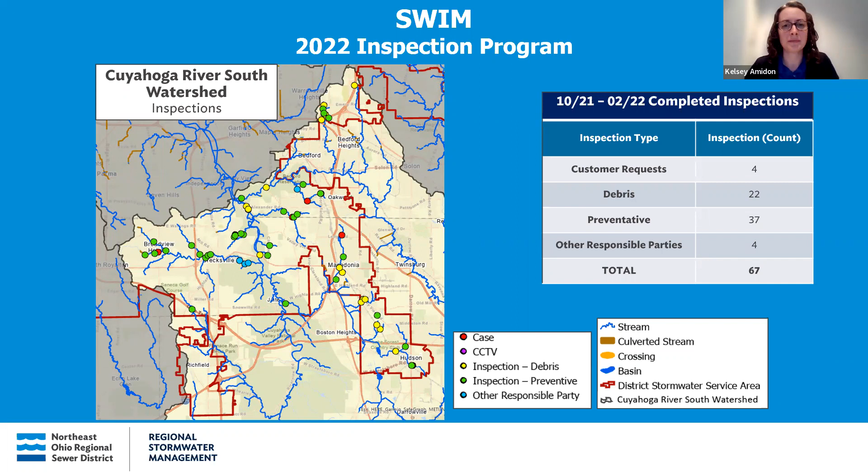So we're going to give a couple examples of inspections that we've done. These are photos from a customer case along Sagamore Creek in Walton Hills.

SWIM recently completed a small stream bank stabilization project at the crossing outlet in 2020. You can see that in the top left photo. The owner of this home called us because they had noticed some new erosion just downstream of that project, so we wanted to make sure our project wasn't causing any issues.

So we looked, and there is some recent erosion in that top right photo. You can see a little bit of recent slumping that had occurred, but it's far enough downstream from our project that we don't think it's related to this. But the bank was actually pretty stable.

Definitely some slumping happening, but it's very well vegetated. There are gabion baskets on the opposite bank, but they're in pretty good condition. Just downstream of this area it becomes pretty stable with lots of visible shale, so it seems to be a pretty isolated area. We're going to continue to monitor this area to see how the erosion continues, and then assess from there.

It's also part of a greater project area for stream bank stabilization, pending our internal prioritization and vetting process.

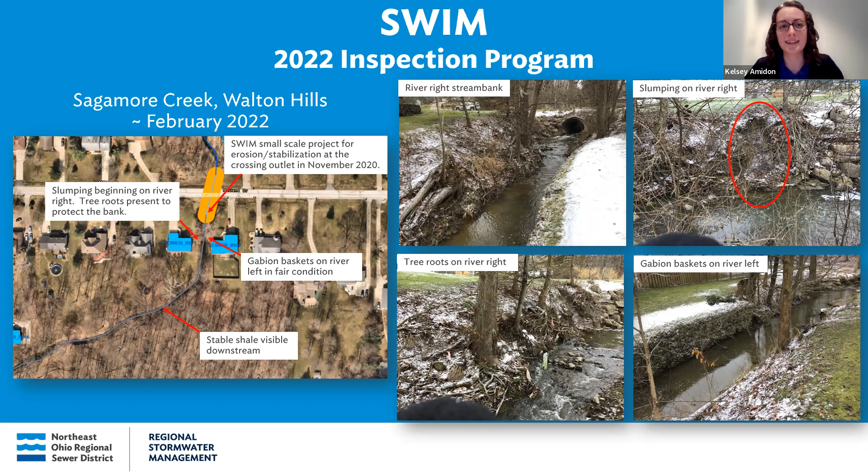So another customer case for erosion, this time in Sagamore Hills Township. The stream banks on River Right and River Left are both eroding, near this pedestrian footbridge.

If you look on the map on the left, it's just upstream of a culverted stream. This customer called because they're concerned about the erosion coming near their deck and their home, so we went out and looked at it and took some measurements.

We noticed that there is a small sediment bar in that top left photo, kind of in the center, and that's pushing the flows towards that left bank and a little bit closer to their structures. It's not necessarily affecting those structures at this time.

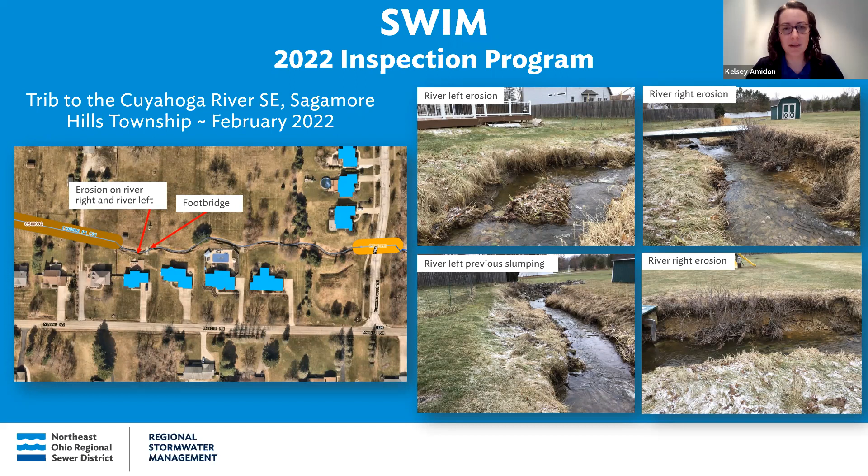So we are going to keep monitoring it to see how it continues and if maybe it's self-stabilized a little bit. We also nominated it for a small scale project to stabilize this and remove that sediment bar to take some of the pressure off that left bank. This asset is also part of a much larger project area that's still pending the internal prioritization, but we're going to keep monitoring it and potentially do a small scale project at this site.

A couple examples of the maintenance. In December, our maintenance crew was out removing debris at the culvert under Derbyshire Drive, and they noticed that the flow was extremely low compared to normal. So we went out to figure out what was happening out there.

We discovered a small blockage upstream of the culvert. The blockage wasn't huge, however this is a pretty flood-prone area, so we went ahead and removed that debris, especially because it's upstream of a culvert, and we don't want it moving downstream into the culvert where it would be harder to remove. This was just a preventative action to make sure the streams are free and clear and conveying, ready for the storm events probably coming this spring.

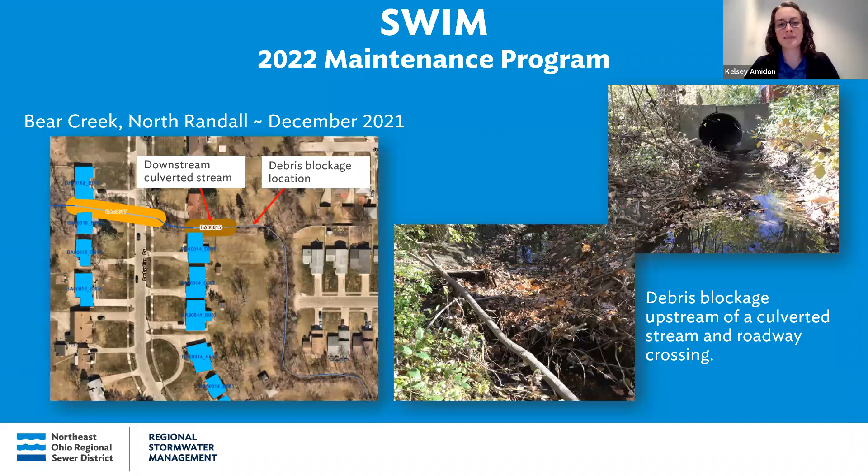Last, we finished up a small scale project in Valley View under Morningside Drive. In January of 2020, an inspection revealed, in the top left, this kind of extreme erosion around the river left wingwall.

We noticed there was a lot of sedimentation at this inlet. If you look at the center photos, the top one is before and the bottom one is after we did a sediment removal in 2020. After that was completed, we went forward with a small scale project, which is the after photos on the right side of the screen.

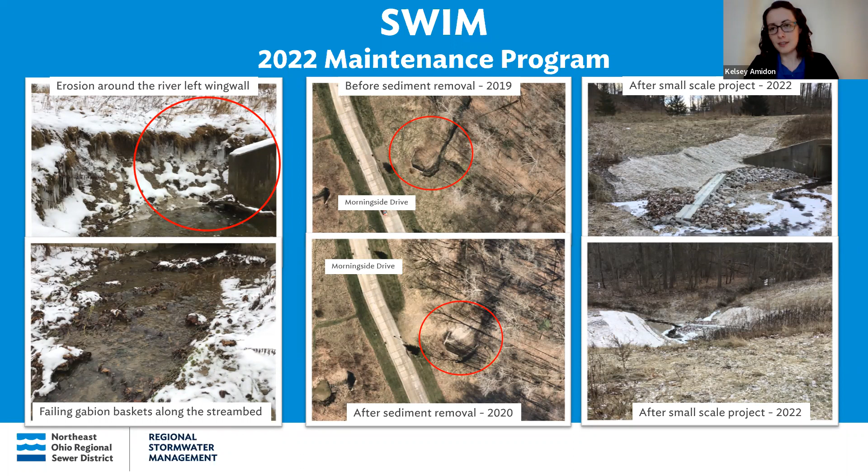This project was completed in November of 2021. We stabilized 61 linear feet and aligned the flow path so that it's no longer hitting that river left wing wall. They also installed a concrete block vane arm, which you can see in the upper right photo. That was to reinforce that bank as well as to discourage sedimentation at the inlet, hopefully keeping it from eroding as it has in the past.

With those projects, we have started establishing project monitoring plans. These were developed for 34 project sites, which includes 13 small scales and 21 design and construction sites thus far. As we continue to do projects, we will create more of these. These are a list of standard work instructions specific to each site, detailing what we need to monitor and the components of the project. These are not an agency requirement, but a standard operating procedure we created so that we can help protect our investment.

We'll look at things like the plantings, how the plants are doing, whether they're healthy, if there's invasive species, as well as what structures we need to look at. We monitor these sites twice a year for years 1 through 3, and then annually for years 4 and 5. After that 5th year, we determine based on how the site is doing and what it looks like, how often we need to monitor from then on.

This is our Bear Creek stream bank stabilization site in North Randall, completed in 2020. There had been some erosion, especially around a local outfall at this bend. When we went out, shown in the photo on the left, shortly after it had been completed, we noticed that some of the new vegetation had been deer browsed. So we sent out our internal maintenance crew to put tree cages and better protect that vegetation, as you can see in the photo on the right.

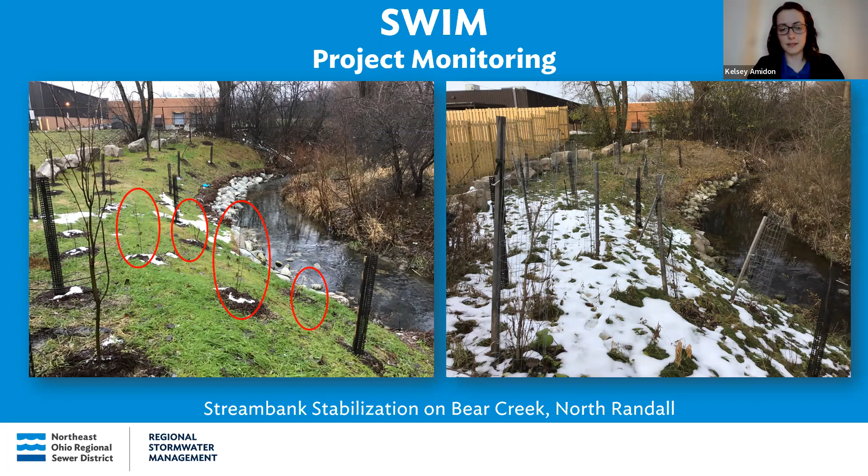With all of those sites, whenever we need maintenance, we have this internal landscape maintenance crew that provides services such as mulching, planting, replacing trees that have died, adding tree protection, and trimming trees. We do a little bit of invasive species management too. This is after the 1-year warranty of a project, if it's within that 1 year, the contractor will perform the maintenance. But after that, we have this internal maintenance crew that will go out and do the maintenance, so they can protect our investment better.

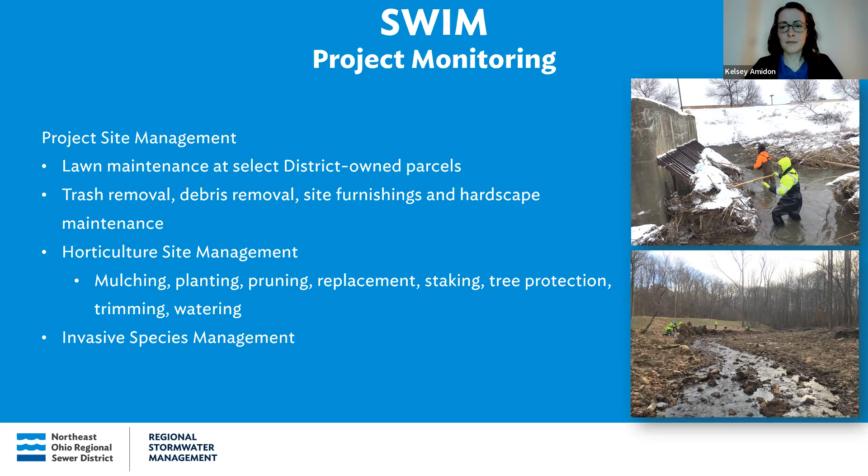No questions? I don't think so. We do, I thought I had one question, Rachel. It might go back to Myring, it was a throwback to the initial conversation about the flood tool. You saw that question come in, Myring? Yeah, Claire, if you go to the link, you'll see there are different options there, so parking lots and things like that, yeah, you can put those in there. So if you don't have an address for the structure that's flooding, if it's a parking lot or a restroom or a road, we definitely want to know about that.

If it's part of the natural area flooding, that's not something for the flood tool to use. So if you have a parking lot or a road or infrastructure for Cleveland Metro Parks that's flooding, just put in the coordinates if you don't have an address. That will populate a point on the map for us, and then just make a description. There's also a way for you to upload photos, which help a lot because when we do the modeling, we can see what the water level was in that area for different storm events. I hope that answers your question.

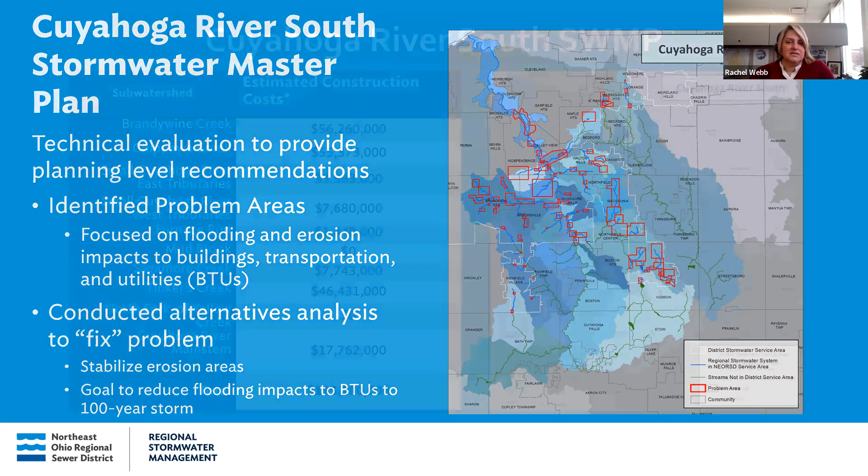Those were the types of recommendations that came out of the Cuyahoga River South Master Plan and the subsequent 3-4 we have done. The costs associated with those problem areas were upwards of $195 million for the Cuyahoga River South master plan, and those problem areas are the red boxes. Hopefully you remember this from past presentations, but it's just a refresher on what we did and how we got to the problem areas through this planning process.

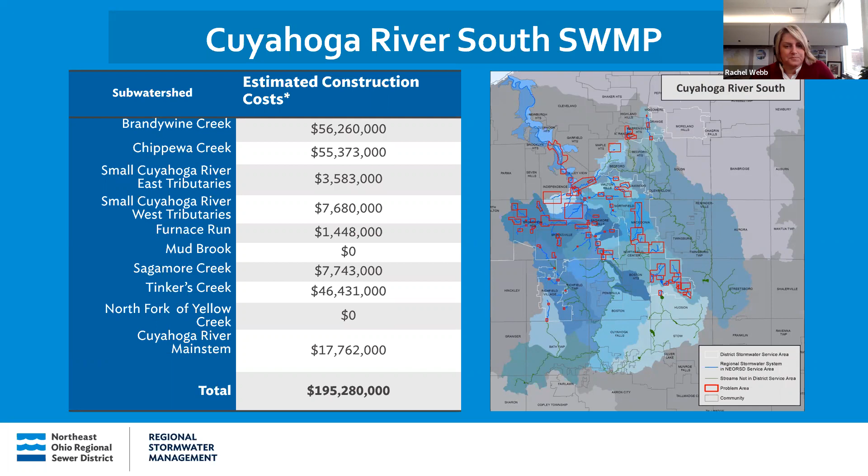So thinking beyond just the South, we have master plans completed and problem areas identified for two other identified watersheds - the Cuyahoga River North and the Rocky River. There are 70 problem areas from the North, 152 from the Rocky River. I'll say it's not that the Rocky River has double the problems, it's a different way problem areas were identified there - they have more, smaller problem areas, while the South and North have some larger problem areas, so fewer of them. Then there's the Chagrin Lake Erie tributaries on the east side, which we lovingly call the 'chalet.'

We should have the problem areas and projects for that sometime in the middle of this year. All of those will get nominated, along with the ones currently nominated for all three master plan areas, into the stormwater construction plan. We've mentioned this before - all of these problem areas are in the stormwater construction plan, however they're not all scheduled. We have a construction plan scheduled only out 1 to 2 years, looking to do a bit further than that, but really just focusing on the next couple of years. So while they're all scored, they're not necessarily all scheduled and planned out.

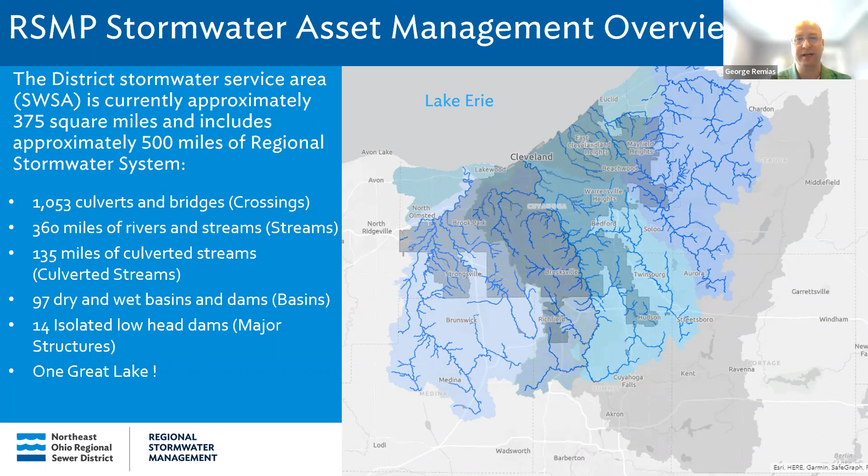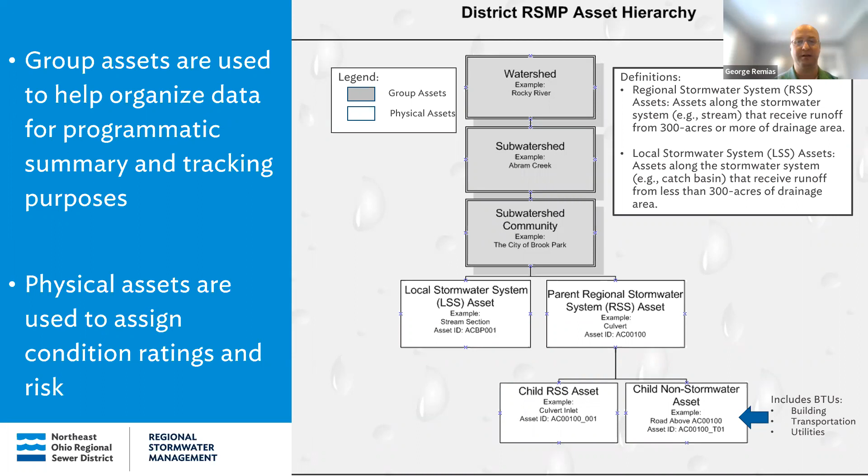And that's exactly where they go. Those are the assets we're really going to be talking about here in terms of assigning risk.

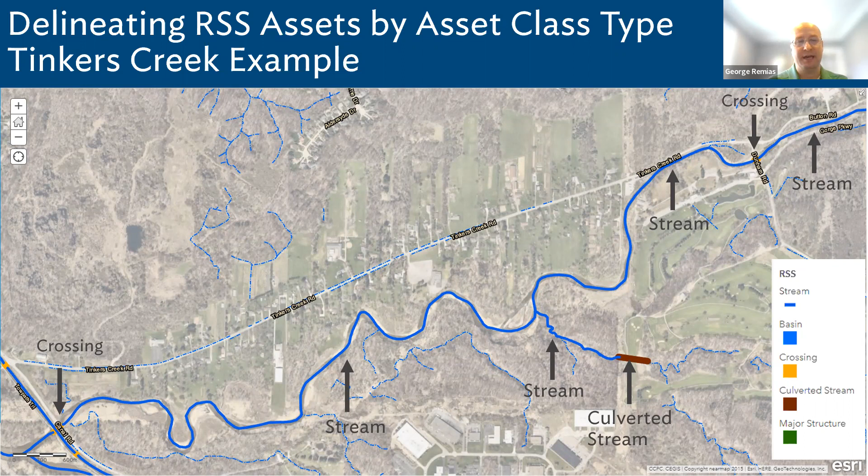So each of those we're really looking at and assigning different types of risk to, and that's what we're going to get into here in a little bit.

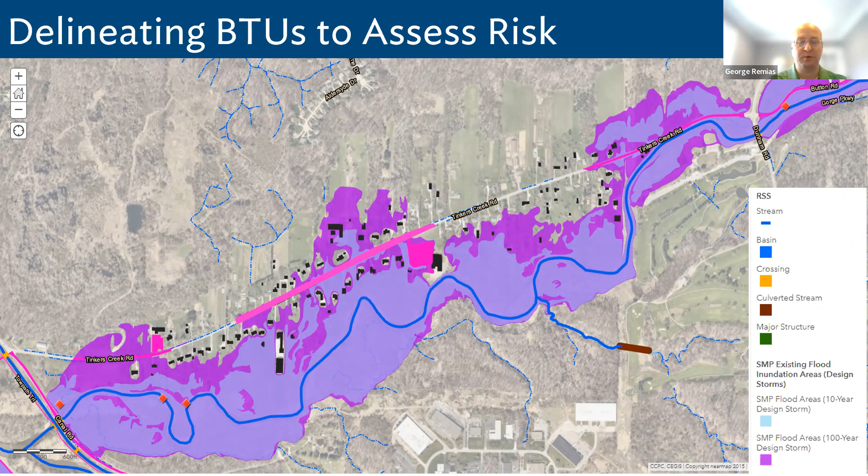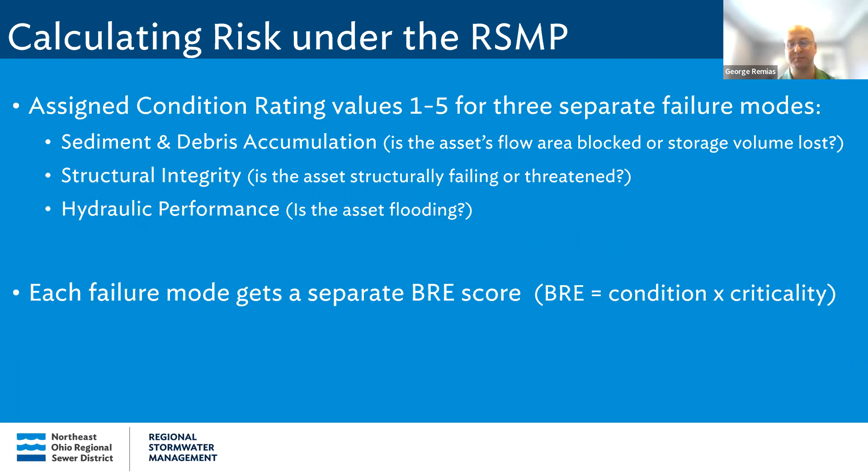So for each of those condition ratings, since we have a criticality value assigned to each asset, we come up with that business risk or exposure score by simply multiplying condition times criticality. And then many of our activities are influenced by those scores.

And then what we're going to focus on when we talk about this probable annual risk is really related to those field-based structural risks or those model-based hydraulic performance risks.

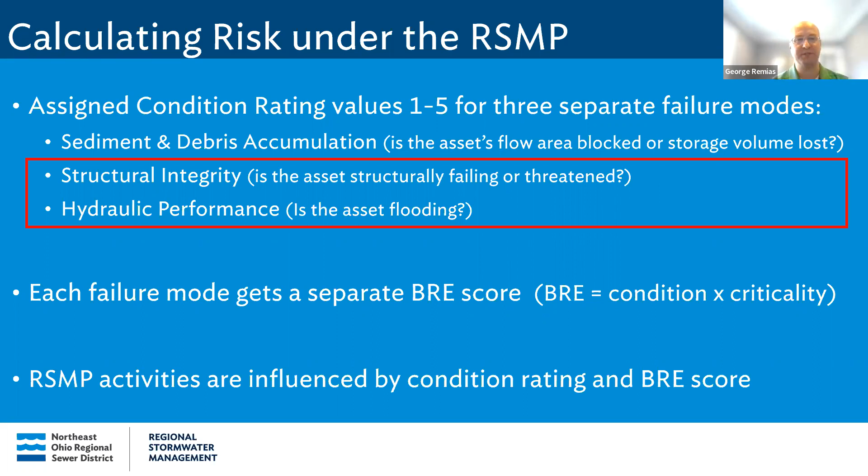What is the public safety impact? What is the environmental impact? And then what is the fiscal impact? Each of those gets a 1 through 3, and collectively we get a 3 through 9. And that BRE score, you kind of see our tier system.

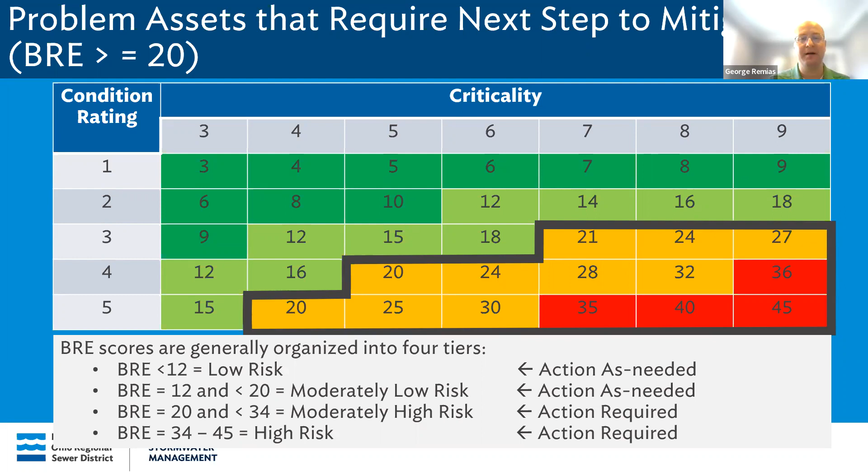And when we have a BRE score of 20 and above, we consider that an unacceptable risk in our program. So you see the different tiers, and we're going to get into what that risk is as we introduce this PAR score.

So as Rachel mentioned, we have a lot of projects that have been nominated. My number is a little different than what you saw from the others, as they focused more on just the master planning projects. Mine really incorporates not only the master planning, but also projects we've found in the field through our SWIM group and other one-offs added outside of the master plans.

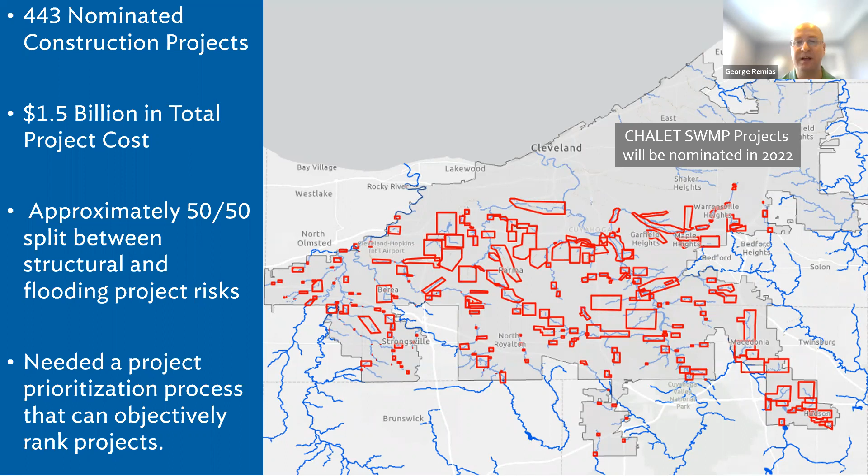With that total cost, roughly $1.5 billion overall for all those projects, and looking at what was driving those projects, many of them were split between structural and flooding risks. We realized there was a prioritization process we needed to develop to help figure out how to prioritize these projects.

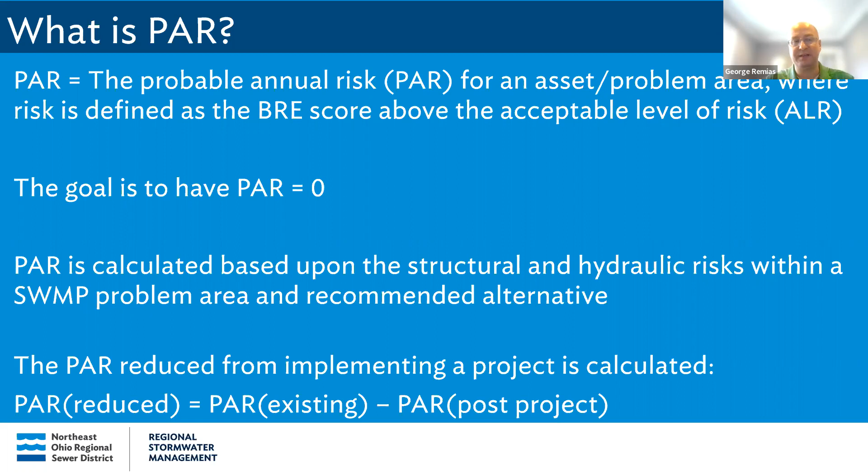And we calculate it by comparing and calculating all the structural and hydraulic risks within each of those respective problem areas and recommended alternatives. So the score that we are coming up with is by looking at that overall probable annual risk of what's been reduced by what exists today, what is remaining after the project is completed, and then that difference is what we consider as that reduced PAR.

So for the structural risk, it essentially is based upon an existing field-based assessment. So the probability of that risk actually occurring is a 1, because that is current conditions. The challenge of probability when we apply stormwater models is where this becomes more important.

So when we look at these design storms with our swim models or other stormwater models, the probability of each of those storms is where this probability comes into play. So for any given year, the probability of a 1-year storm is, in fact, it should happen at least once, so we have that probability of 1. Whereas a 10-year storm has a 10% chance in any given year, so we have that probability as 0.1. And the 100-year storm has a 1% chance, so it's 0.01.

So by taking that risk score and applying that probability to any given asset, we total up that total score, and that ultimately becomes the probable annual risk for either an asset or the problem area as a whole. And so I'm going to go through an example here next.

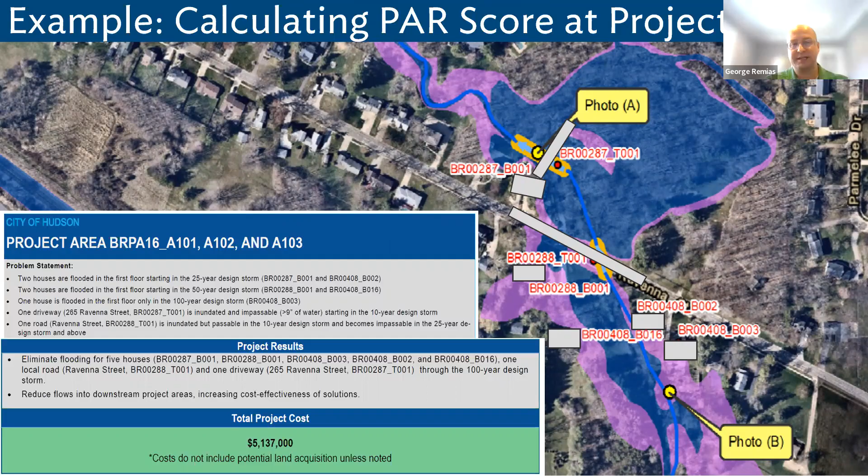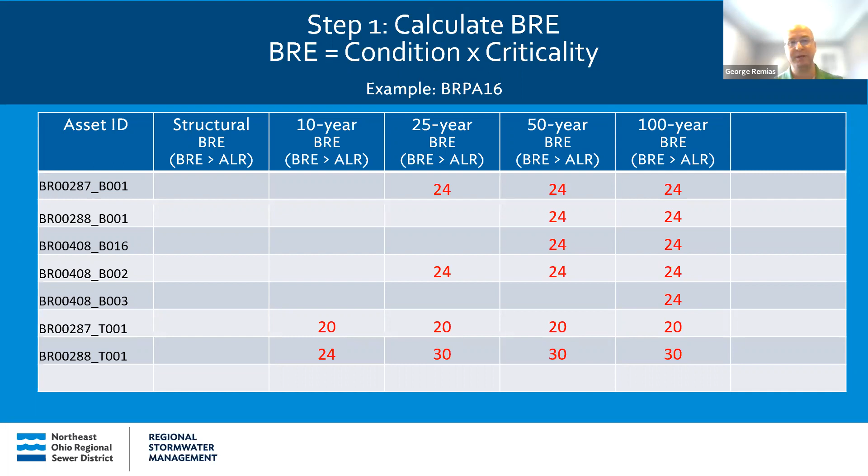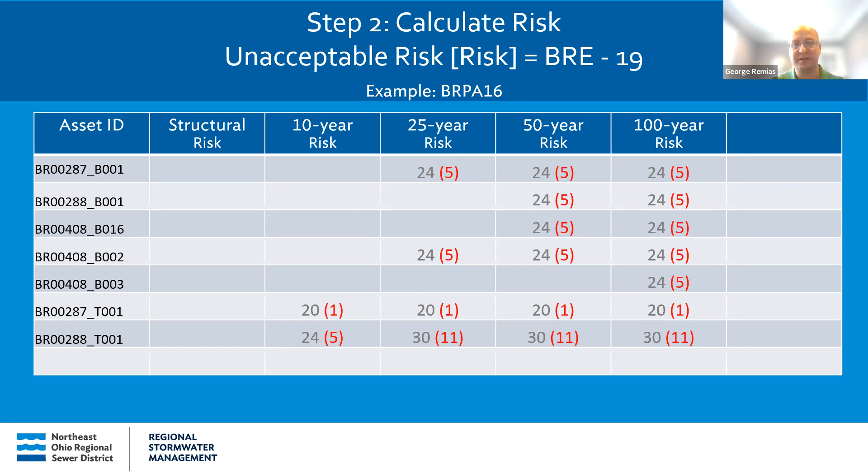So what we do is take that BRE score and subtract out that total points of 19 to get what is then considered the unacceptable risk. That's what you see in the red parentheses. So 20 minus 19, for example, gives a risk of 1. You can see the other scores.

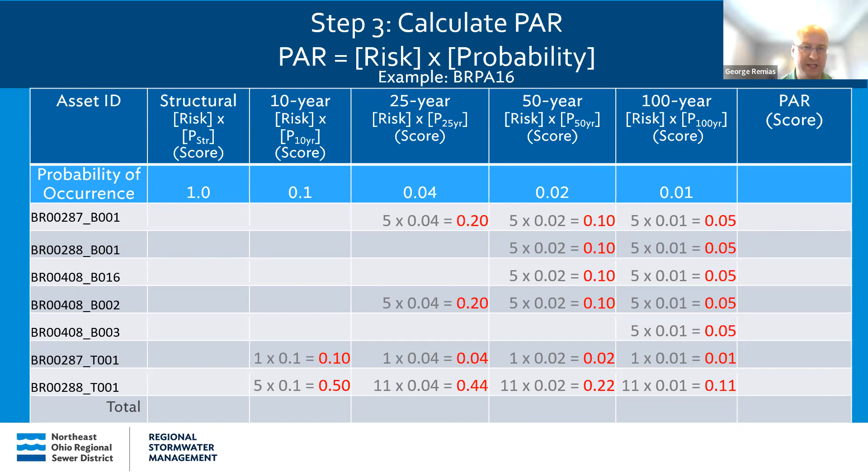Then we multiply that number by the probability of those particular storm events. So for the 10-year storm, you'd apply that risk by 0.1 to give you the total par score of 0.1 for one particular calculation. You can see how that was applied across all those values.

Then in order to calculate the total probable annual risk for this problem area, you just sum up all those values. You can see the value in the bottom right for this problem area is 2.49.

Now be mindful that number is roughly 40 points. If you remember, we assigned 40 points for reducing structural and hydraulic risk along the system. So this 2.49 doesn't seem like it's that big of a deal. Why do you need to get into this level of PAR?

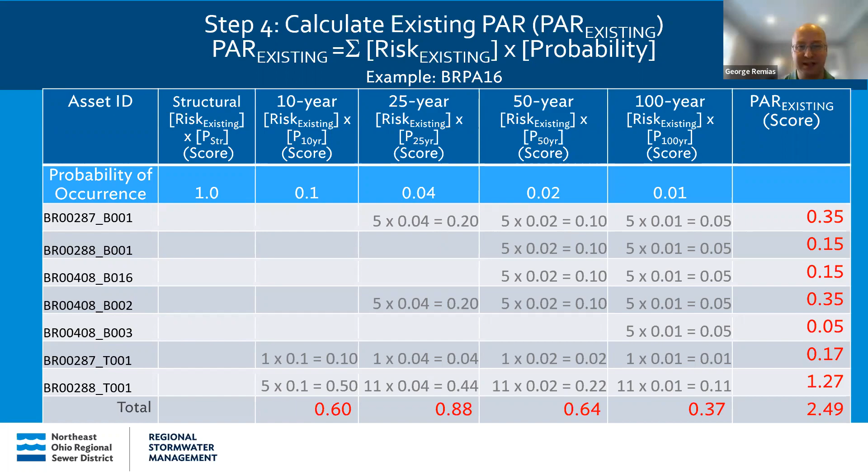That's where the next slide comes in. So in this example, this is a different problem area, and the actual PAR score for this is significantly higher - over 797 points of PAR, or probable annual risk. You can kind of see why.

The number of inundated buildings ranges from 9 to 136. You can see that on the table - 9 at the 1-year and 136 at the 100-year. And there is a structural risk here. By summing up all those PAR scores, you can see it's a much higher score than that assigned 40 points we had originally.

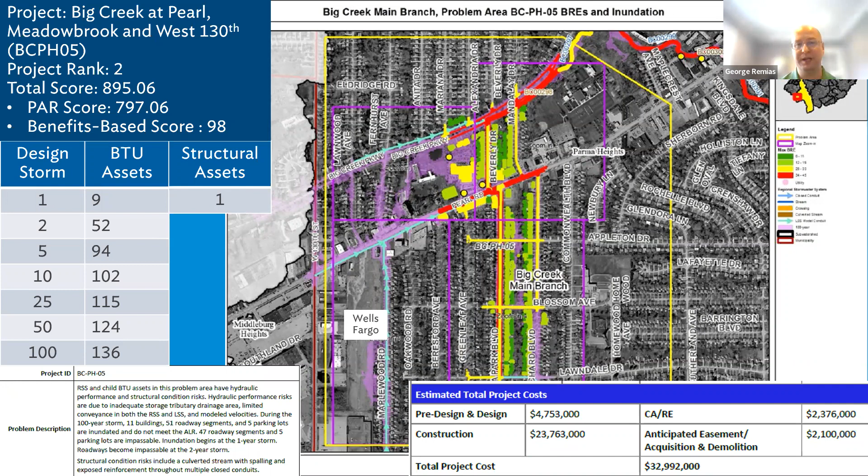So by adding that to our original benefits-based scoring system, the total score is much higher, and all of a sudden this becomes a much higher priority problem area compared to what it was before. Now if you look at that total project cost of $33 million on the bottom right, that gives you a sense that this is not the type of problem we can just solve on its own in a single project. That's where the next challenge comes in.

By applying this kind of methodology for prioritizing projects, it seems to make a lot of these big problems jump to the top of the list overall. This seemed to be a better approach, at least for identifying what are the biggest problems in our service area, not necessarily the first projects we are going to address under our program.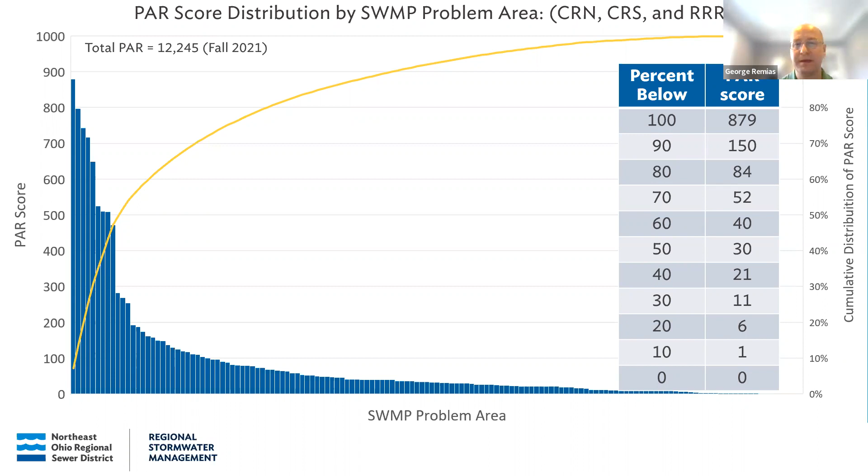So you can go back to the original 40 points we assigned to those problem areas for risk reduction. By applying this PAR methodology, you can see roughly 60% of the problems actually seem to fall within that system, but there's an additional 40% that, by applying this logic, helps elevate just how big of a problem there really is.

And at this time, back on our original numbers, the total probable annual risk, or PAR score, was a little over 12,000 points. You can see that in the upper left corner, and we're going to use that from a tracking perspective.

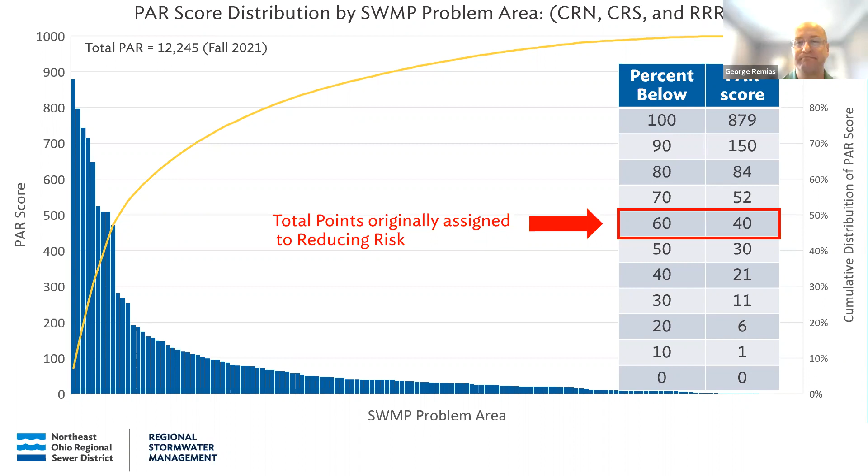So now that we've applied this, there are a lot of different benefits to using it. We can summarize total risks by an asset, whether it's a building, a road, a crossing, or a total problem area, like we showed in a couple of those examples.

Now we can also assess what risk remains once a project is completed. If there are problems at the 100-year level and our project can resolve those up to the 10-year level, that remaining risk still exists, and that's something we can still track. The question then became whether this approach can help us with phasing a complicated or expensive project. I have an example for that next.

Here's an example. This is one of those bigger problem areas, located in Big Creek. In this area, the total PAR score is high, lots of flooding. It starts flooding at the 1-year storm. There are some structural issues with basins and culverted streams, and its probable annual risk, or PAR score, is 611 points — a big problem.

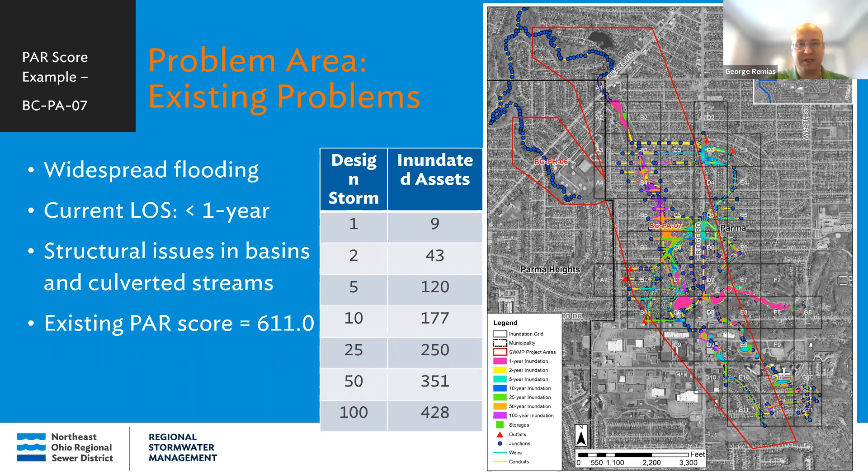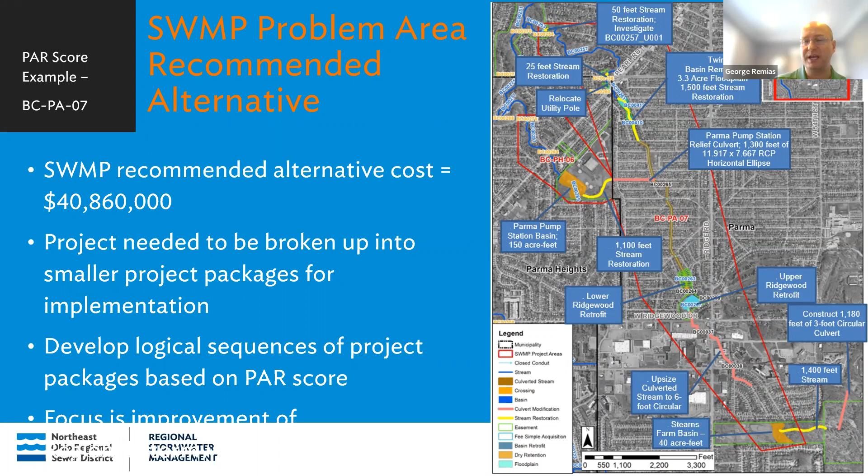When we looked at this under the master plan, there was a whole range of projects and solutions to come up with, which you can see on the right with all the text explaining certain solutions to help implement and reduce that overall risk. But the total project cost was a large number — nearly $41 million. So how do we break this up into smaller packages for implementation? That's where this PAR score approach came in, helping us come up with the sequence for these projects.

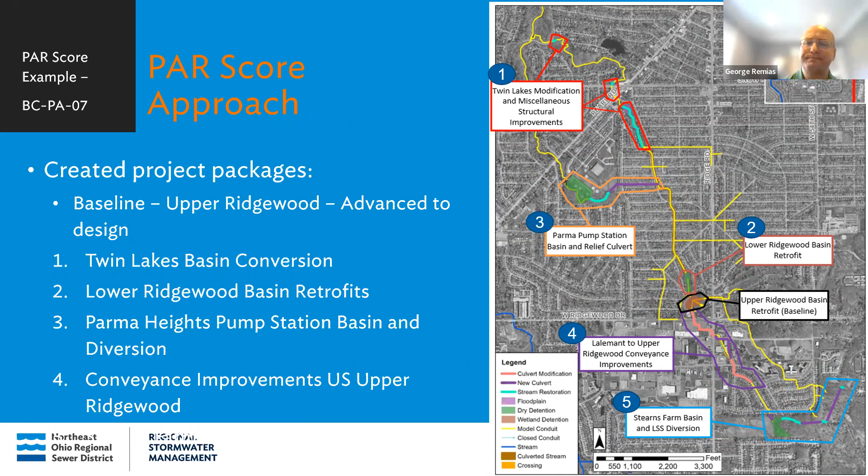What we did was take all those recommended improvements and group them into various problem or project packages. Then we played with different sequencing orders of those project packages. You can see those on the right in the different table.

It shows each of those respective projects with different orders, and we looked at their PAR scores. On the right, if you care to look at how it was assessed — but the graphic on the left, I think, helps explain it even better.

You can see the same projects with different sequencing. Sequence 1 is in red, sequence 2 is the green dash, and sequence 3 is the orange dash. It shows how the PAR score was reduced after implementing each respective project, realizing the ultimate PAR reduction would be at the end. Looking at these three different sequences, we all agreed that sequence 1 was the best approach because it produced the biggest reduced risk by introducing the first initial set of projects before getting to the end result. Everyone collectively agreed that was the right approach.

So with that in mind, it seemed like the PAR approach helped us not only figure out what kind of risk we had at a project area, but also how the sequence of projects helps reduce the risk, and at what cost.

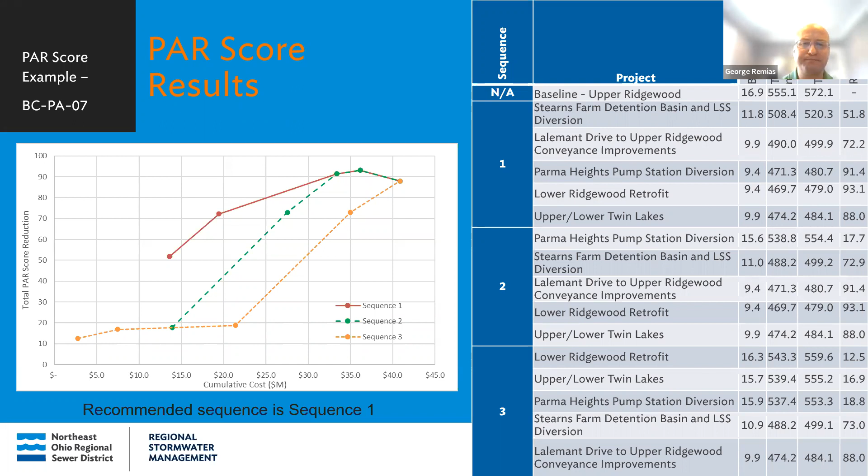This is just a quick summary of how that PAR score was reduced by looking at the different problems. As I noted before, not all projects reduce all the PAR scores, so this shows you what remains for this sequence of projects.

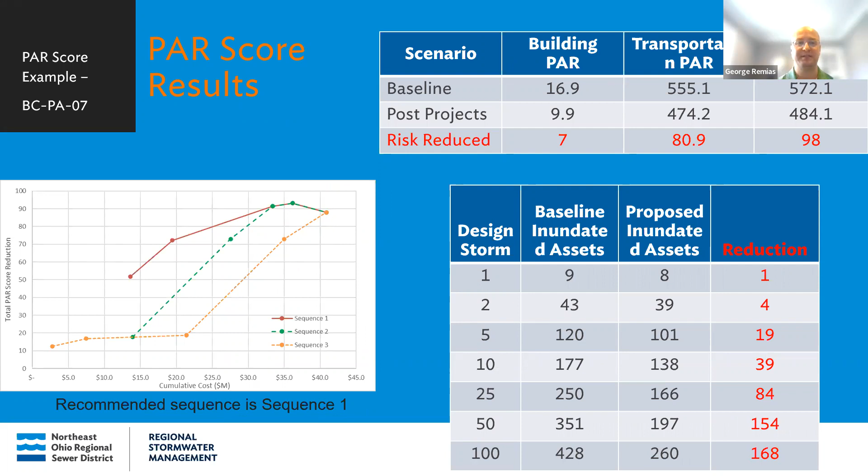So with all that in mind, what are some other reasons to use this PAR? Now we can better understand not only what risk exists, but the different types of risks we have, whether structural or hydraulic, or even by different design storm or by project sequence.

We can group those assets. If you remember how we have watersheds, community, even asset class type, we can now look at these collectively as a whole to better understand if there are certain trends.

And we can track this at the programmatic level. We want to use this to say, okay, what is the current risk we're aware of across the service area? And as we implement these projects, how is that risk being reduced? We can use these numbers to follow this along as we introduce projects, implement them, and reduce that risk.

And that's one of the reasons why we also want to use it, to help demonstrate some of its success. Just saying that certain problems have gone away is always good, but can we help quantify it and track it moving forward?

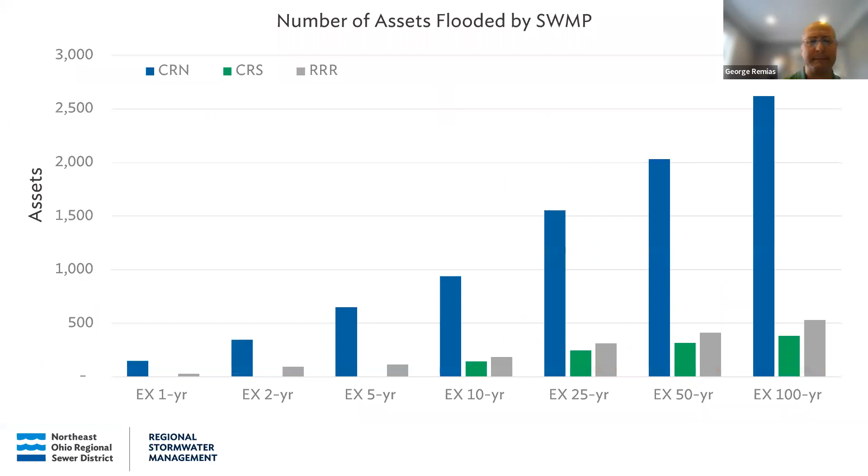When you break that down even further by the different design storms, you can see, from the North being in blue, just how many more building and transportation assets were flooded compared to the other two areas.

And so this is just one of the reasons why we noticed as a trend why the North has so many flooding problem areas.

So we also then, as I spent a lot of time talking about the hydraulic, because I think it's the most challenging one to grasp, but we are applying it at the structural level.

This is something you've seen in the past with our swim group, looking at all the different stormwater assets and how we've assigned the structural PAR to it as well. And this gives you a quick summary.

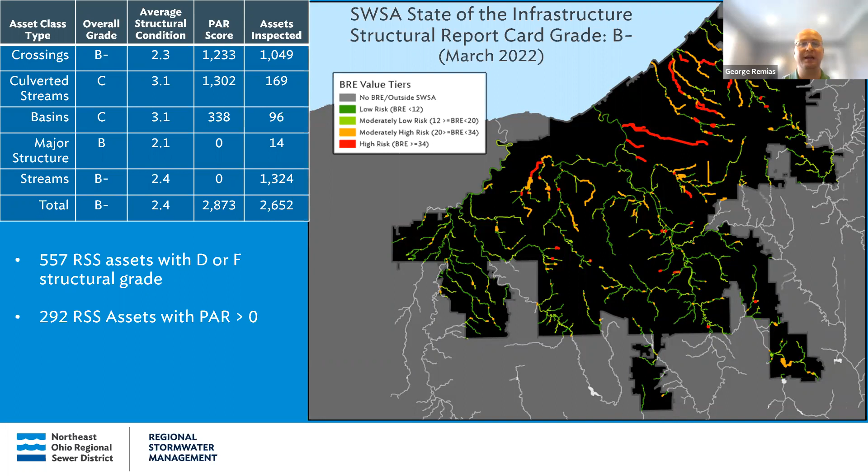We have the different condition ratings by the different asset class types. And not only can we say how many assets are structurally failing, but we can also apply that PAR score as well. So you can see the PAR score by crossings, culvert streams, basins, and the total overall. We can use this once again as a baseline as we move forward with implementing projects across the service area.

And so what are some of our next steps? As we go to implement these projects, or we discover new things through our field inspections, these scores will be updated.

We'll be able to track this under the program to demonstrate the project benefits.

We're going to be looking at how to streamline the stormwater modeling process to calculate this. As you would expect, there's a lot of post-processing, so the quicker that we can get to that end result, the better.

We are exploring tracking this at the local level. I think Frank mentioned how we're interested in extending these models, as appropriate, into the local system and applying that same logic that we just did at the regional level of buildings and roads that flood.

And so on top of that, we want to look at whether there's some resiliency in the service area, as we look at whether it's due to climate change or sediment debris accumulation. There'll be more to come with that in future meetings.

So with that, I'll see if there's any questions before I dive into the second topic. I do not see any questions, George. Okay, well, I know it's a lot to digest, so we'll just get into the next piece.

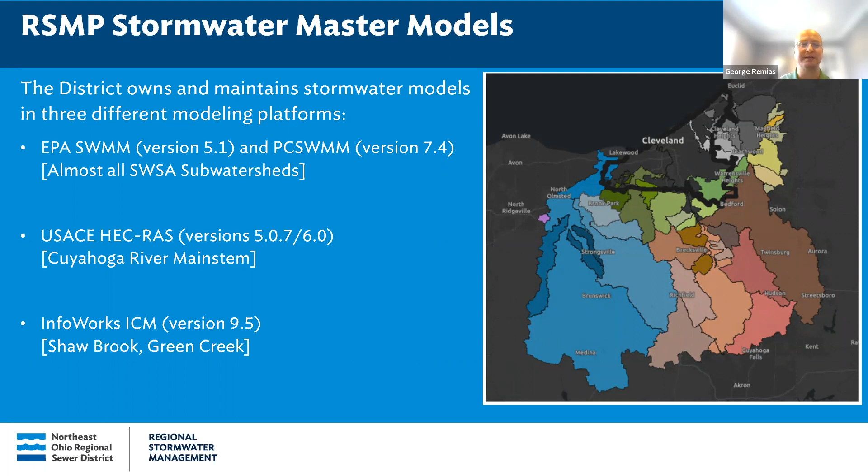At a high level, these different sub-watersheds are highlighted in the graphic to the right. We have a lot of these models currently in EPA SWMM/PC SWMM - almost the entire subwatershed or stormwater service area is modeled there. We also have a couple of models along the main stem of the Cuyahoga River in HEC-RAS, and in the combined sewer area, we manage those in a different application called InfoWorks ICM.

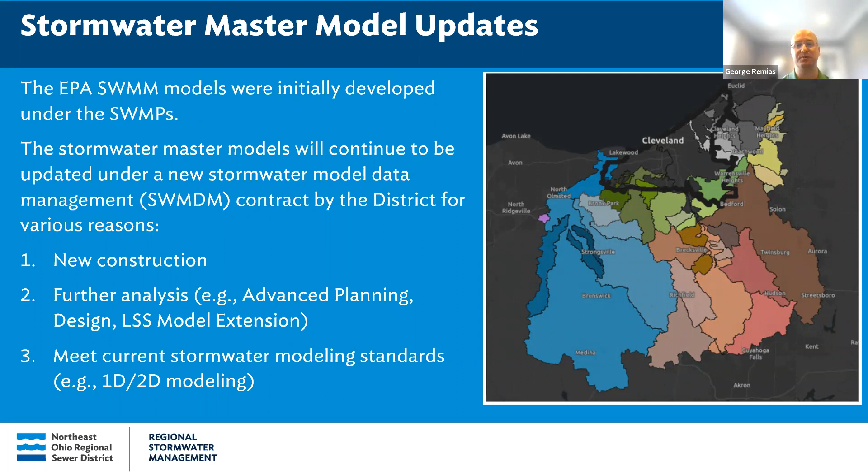As we now have a new contract for stormwater model data management, it's really intended to keep these models up to date and extend them where needed. Many of the reasons we want to update these are due to new construction, or as we continue additional analysis through advanced planning, design, or local model extensions that occur from time to time. As we introduce new standards - like the 2D modeling in certain areas I showed earlier - we want to make sure these models reflect all of those new standards.

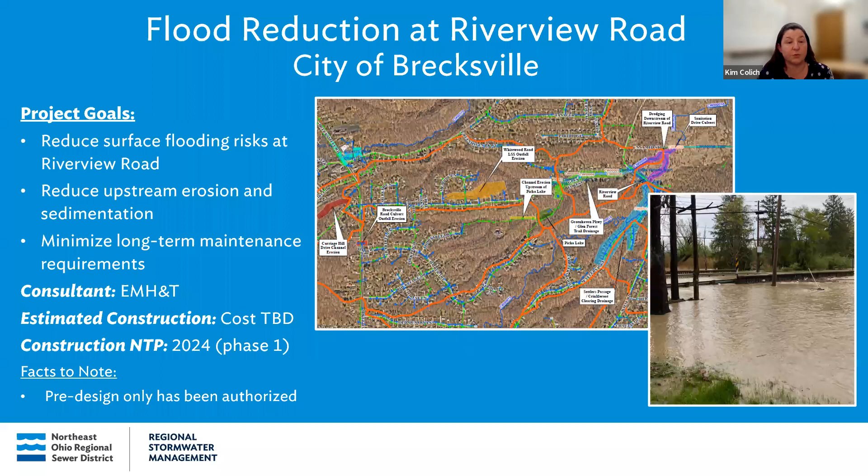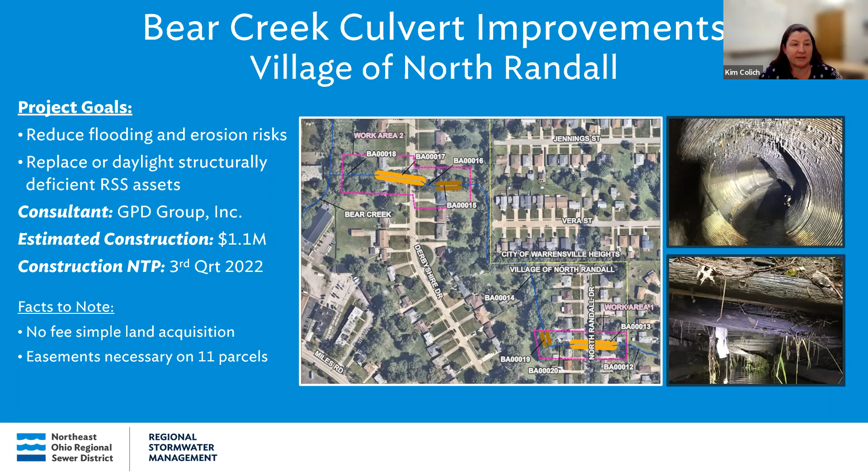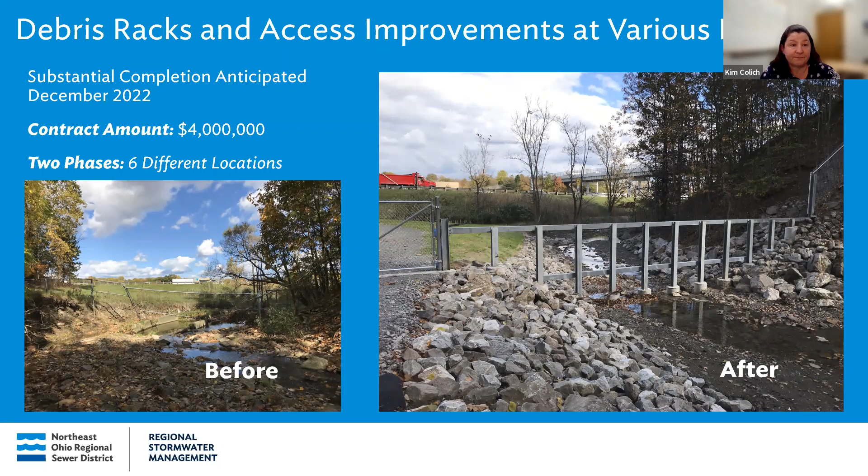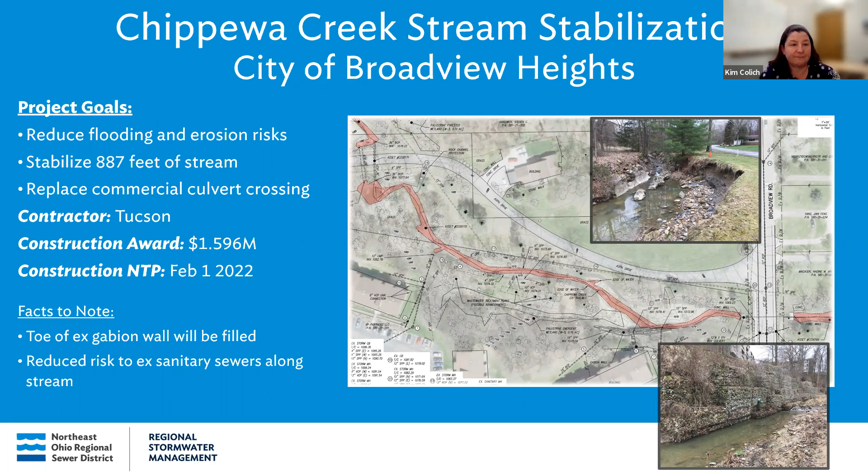And I guess that was all of my design and construction projects. At this point, I'll turn it back over to Myron to wrap up.